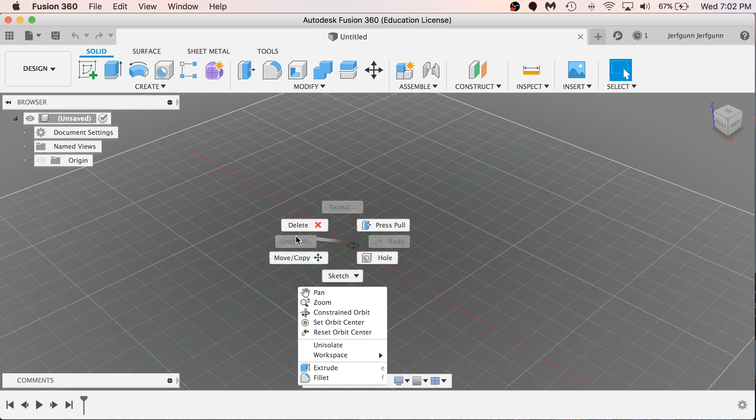There's a couple ways we can do it, depending on what you want to kick off. If you don't mind kicking off at the end of the class, we can prepare the quick job on Monday. You'll need the software. We can also do it in a break, but then you'd need to download and install the software.

That's gonna require some... by the way, he didn't model that, did he? I did not model that. You just ripped the file. I did. We're working up to that, working to not ripping the file. Yeah, ripping the files is the best strategy, except if there isn't one file. Then no.

So we're gonna go into a couple of new things this week. But by the end of this class, you guys are gonna be halfway through this intro class, halfway to being fully fledged crazy modeling experts, if I have my way. That's pretty cool. I was really happy with how things went last week, hopefully you guys got a little bit out of it. Okay.

We're gonna shift things up a little bit starting, well, it depends how far we get tonight, but definitely next class. I might have mentioned this last week, I don't normally like to stand up here and lecture and tell you guys what to do. That's not generally what I consider a fun way to convey knowledge, but to get you guys over the initial hump of learning this program, that's necessary to an extent. But starting next week, you guys are gonna start working a little bit more independently on a couple of things.

Where I would like to get to, in some measure or another, by the time we're done with the fourth class, is have you guys either well on your way or have completed a design of your own. And we'll talk, if we have enough time, for a few minutes at the end of class, so you guys can start thinking about what that would be. Basically just taking the things you learned last class and this class and putting it together in a way that allows you to be creative and come up with your own thing.

And I can help you guys get them printed out or whatever, if you want to take a video or what have you. Just something tangible that you guys are creating. So that's kind of what I'm hoping for by the end of the class.

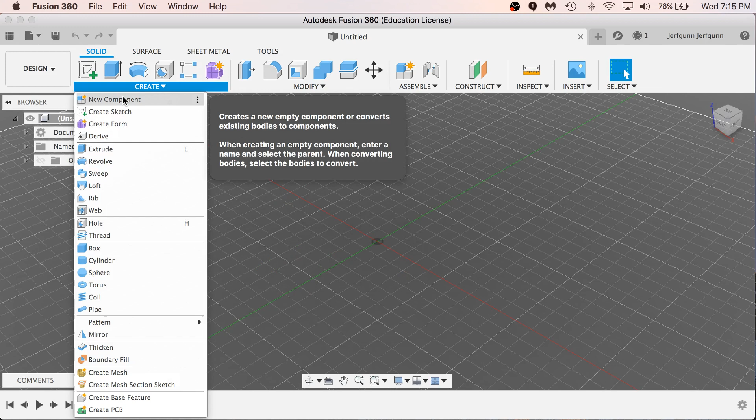So can you go through the create menu? See the option to create a new component? Okay, click on that. Now you can name it if you want to, or just leave it as component one, doesn't really matter. But hit OK so that we get a new component that shows up in our tree over there. Now when we create any sketches and take operations on those sketches, they're all going to be part of that component. We'll probably get to an example next week where that becomes really important, but for now just note it.

Okay, so for our first example of designing a part that actually has precise dimensions, we're going to make a mount. Have people seen these before? Have you seen one of these before? This is called a servo, it's like a little motor. You might control it with an Arduino, or it might be part of an RC car or RC plane.

And these motors, instead of just spinning like when you're driving a car, they go to set positions. So you use it to move the flaps in an airplane, or open and close the hand in a robot, something like that. So if we're going to design something that will allow you to mount this to a frame, we have to design a part that will fit this fairly snugly. It's also going to have the provision to put a couple of screws in to hold it in place. So we get a couple of things there that we need to locate in just the right places, okay?

Let's see. Here, yeah, I have a thing. I want that. You can give it to him. You guys can share. Give me the thing. Give it to him.

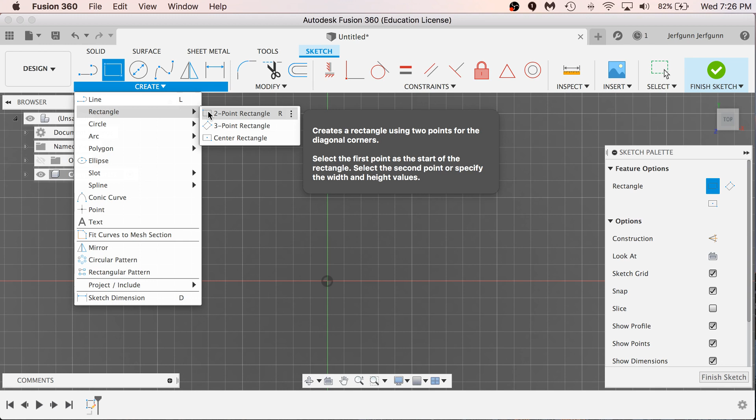Okay, what was his question? I'm sorry, are we going to build a model of the servo in the program and then use that to build the mount? Gotcha. Yeah, which I definitely do sometimes.

Okay, so let's make a rectangle, and the rectangle is going to represent this pocket in here in the part. So that's going to be 12.5 millimeters tall and 23 millimeters wide. So can you do a rectangle that's 23 millimeters by 12.5 millimeters?

The center rectangle, or does it matter? You know, whatever makes you feel good. 23 that way. 23 by what? 23 the other way, do 12 and a half that way, just so it tracks with what we sketched on the board. So do 12 and a half that way, and 23 that way. And if at any point you need a hint or a mark.

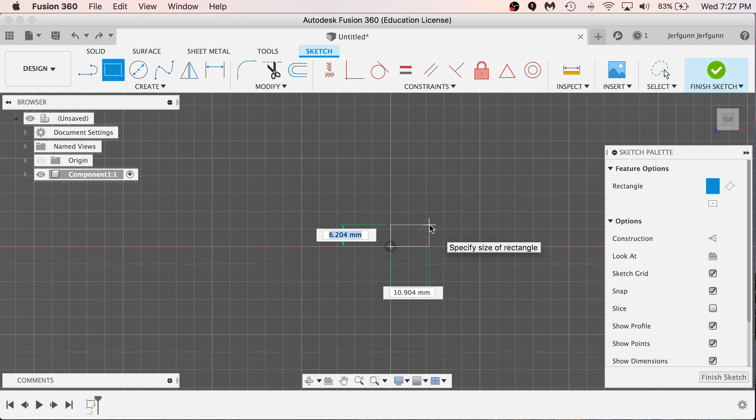How do you... what? You're not allowed to make it.

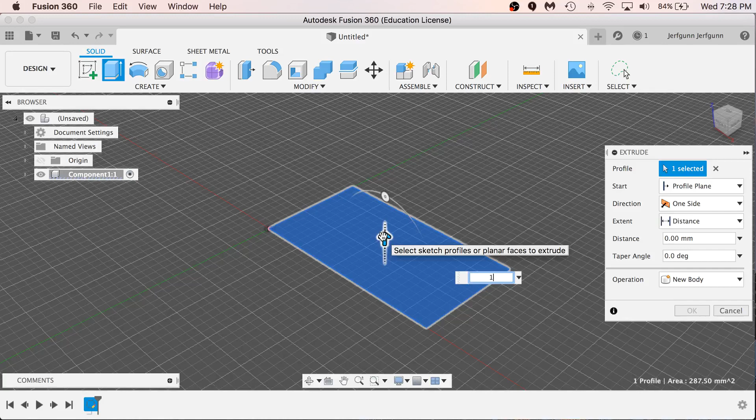So we're gonna extrude this. Set the dimensions, you actually set it on it. I'm gonna press R, it gives you the dimension, and then I'm gonna go up. So if you want 12 and a half this way, you can just type 12 and a half while it's highlighted here. You do 12 and a half, and then you can just hit tab to go over to the other one, and make that one 23. And then hit enter.

All right, so you've got your 12 and a half by 23 rectangle here. Why are you a little tilted? I accidentally grabbed the orbit tool. Okay, that's fine. I just wanted to make sure it actually was a rectangle, because if it wasn't rectangular, we'd have trouble later.

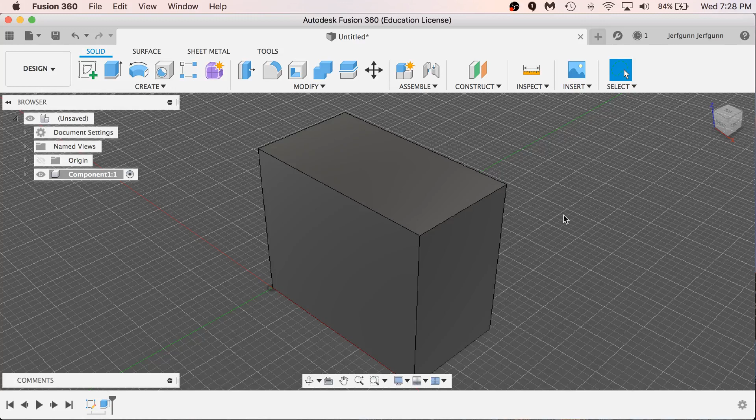Okay, so the next thing we want to do is draw this shape right here. This is the outside of the mount, okay? I'm going to arbitrarily decide that the width of the mount is going to be 5 millimeters. Do you mind if I guide you a little bit here? Yeah, I'm sorry, that's okay. So hit escape to get rid of the rectangle tool.

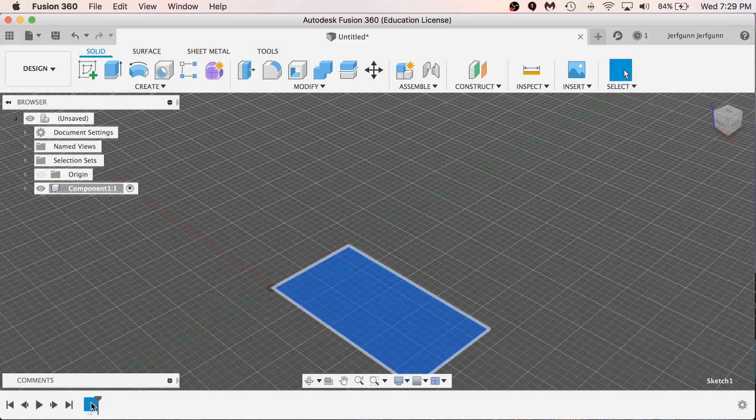And use the line tool, so go to the create menu and choose line. Now this is not the only way to do this, this is just how I'm going to illustrate it this time. Okay, start there. Click there to start the line, and then go off to the left by 5 millimeters.

Jeff, where's the line tool? Create, line - L is the shortcut for it. Okay, so you get 5 millimeters, click to end that line.

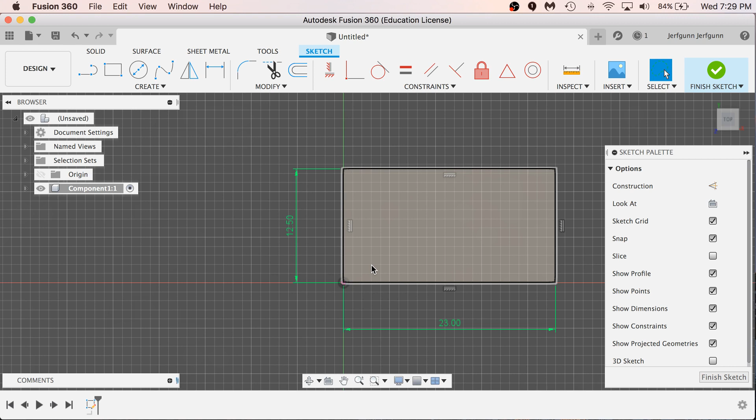Okay, now go straight up, keep it 90 degrees. Did you find it? Oh, you need to be in sketch mode first, so go to create. Oh yep, and then the line will be on. Okay, gotcha, thank you.

You betcha. Okay, so straight up, now if you want to go 5 millimeters past this top line, right? So if you were 12 and a half here, you want to go what, 17 and a half? Yep, good job. So click to end that line.

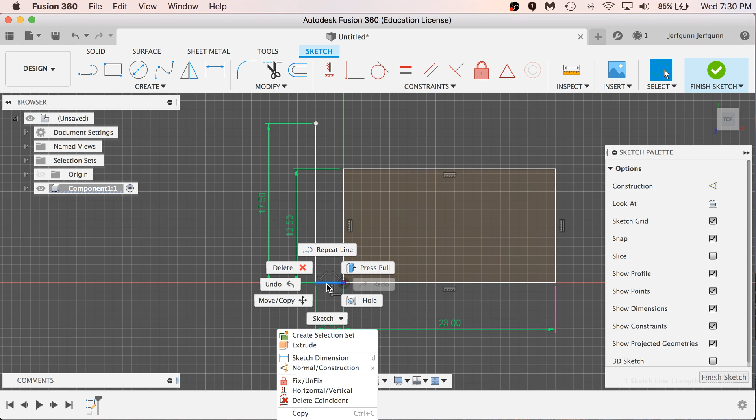Yep, then keep going across. So how far is that one going to be? Well, it's gonna be 23 plus 5, so 28. It would be 28 if you wanted to stop here, because you're already 5 out over here. Oh, so 30? No. 33. 33, so we're using...

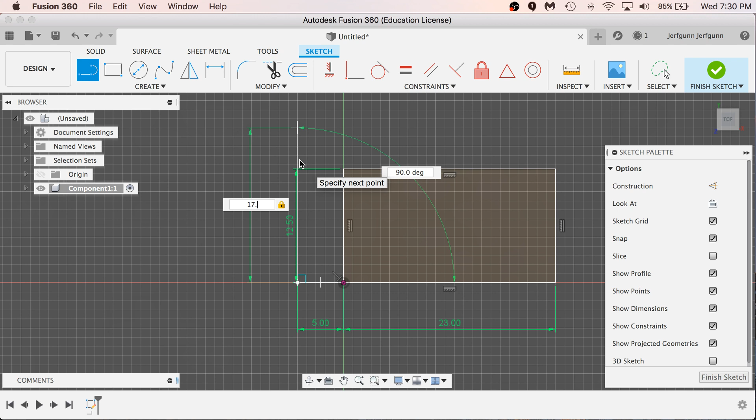I bet quick math. So you can actually, if you double click down in here, you'll go back into that. You do all the work, right? Line, go back - I was just drawing, trying to do the line. How far is this long one?

Yeah, technically, so if you go up to create menu - I'm just starting, alright. It goes 7.5 down, sorry, right? It's on the bottom left hand corner of the page, so we started here. Oh, that's where we started.

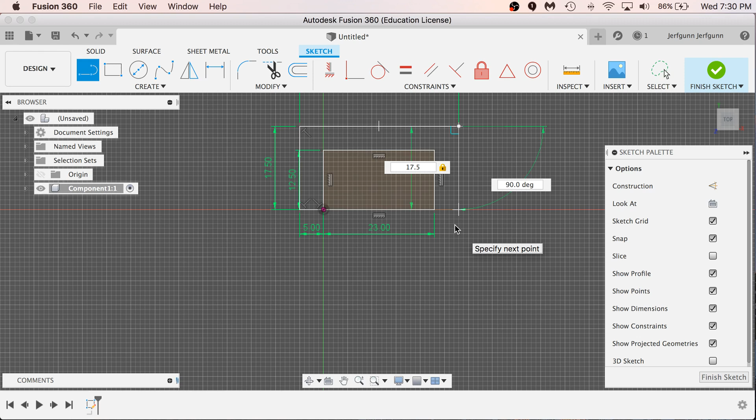Oh yes, let me get it. Bro, it's gonna only be like... mine just auto-filled it. Okay, is everybody sort of in a vague place near what we got up on the screen?

So here we're over 5 millimeters from the bottom left hand corner. I didn't do anything, we're just up - did it. 33, yep. Oh, no, not up 33 - 17 and a half. 17 and a half, and then reconnect down to the outer bottom. That's just the lines we made. Alright, everything's the line tool, all 90 degrees to each other.

Well, I didn't do that. If you're stuck, don't be shy, come over and look over your shoulder. I'm up on the right over there. Oh, there you are, oh cool. Okay, so it looks like you somehow got... click the top.

On the little square - oh, you're still in sketch mode. Yeah, click on the top of the cube there, the little orbiting area. It'll come up as a little box that says... see where it says top, on top of the cube? Got it, thank you. Click on it? Yep, there you go. You can rotate it if you want.

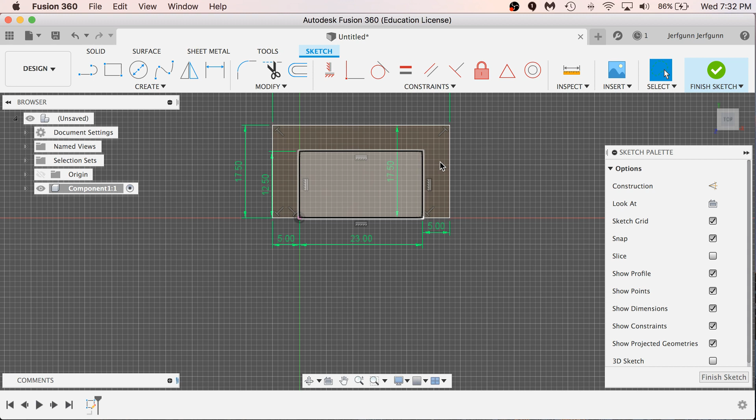I just wanted to zoom out a little bit, right, 'cause I need to see. Yep, that's totally fine. 0.05, right? And then go back into the line tool. That was crazy. Over, got it. Yep, so I went over 5, correct?

Yeah, same though, I don't need a sim. And then go down, it's gonna be 23 plus actually 5 more, plus 5, so 33.

Everything closes and then here, back across... 17.5, it's 17.5, the zero button. Then go back up to reconnect with your rectangle, the zero button. Alright, you guys are doing great. So once you get that sketched out, go ahead and click finish sketch and you go back into 3D land.

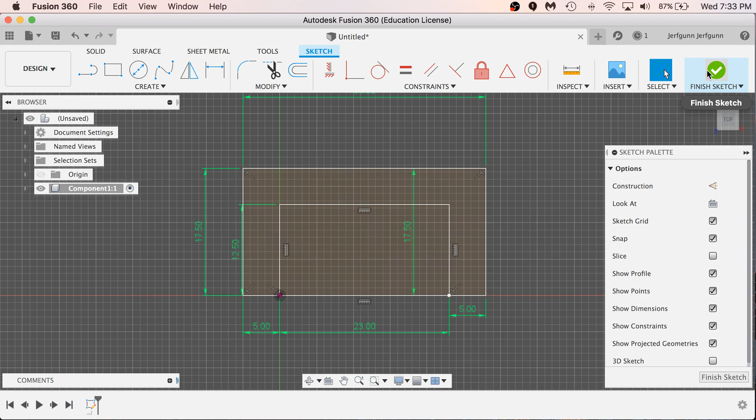And now let's extrude - you can leave the interior box alone, but extrude the outside C shape up the height of the lower part of the circle, which is 19 millimeters.

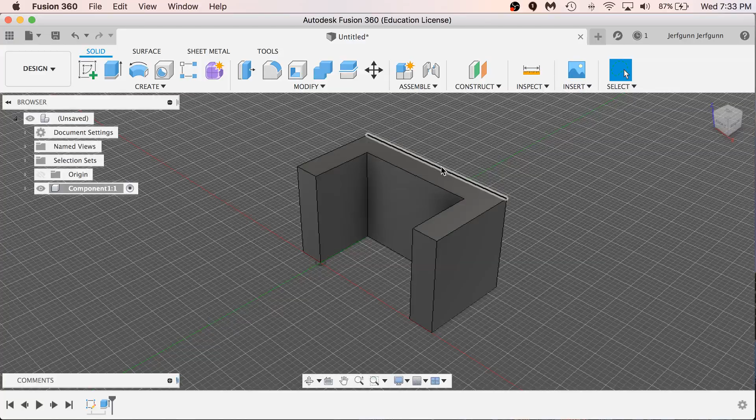So what we've done then, if we look back to our drawing over here, we've created this section here. Yep, that looks great, that's looking good. And how high do you want to go?

So you don't want to select the interior part, you want to select the outside part, so you can click it again to deselect it - the blue one - and then click the outside part.

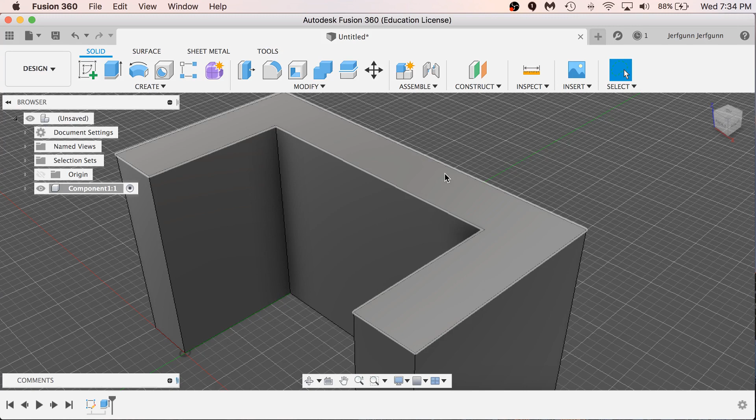Oh, that's weird. Do you not have a closed shape for some reason? Okay, so hey everybody, see up here on Marcus's screen, the line is blue, the inside is kind of shaded orange and the outside is not. When you draw a 2D shape like this and it's closed, all the lines interconnect and it's an enclosed shape, it shades it in orange to let you know that.

For some reason Marcus is not. What am I missing? Well, let's find out. So if you double click to open up that sketch again, the last side right there, I think - the last one right here?

Yeah, I think you need to create a new line. Can you double click on this sketch down here to edit it again? So it's the last one in the timeline. Hit it again, double click.

I am double clicking, it's not doing it now. That's kind of weird, left click it, and then edit, I think also works. You mean right clicking at it? Yes, or left. How do I get back to the flat? Yeah, right click wasn't doing it either. Let's get back here, back to it.

I enjoy this a lot. Yeah, you know, that's right. Yeah, above - how did your cube do?

On these two corners, like where the lines would normally reconnect - because I think one of them is maybe not totally connected. Yeah, that one's not quite connected. Oh, look at that, yep. So can I just drag it over? Yeah, do that.

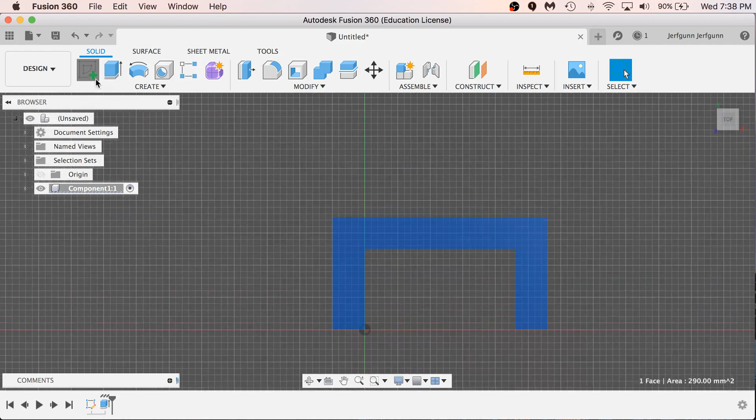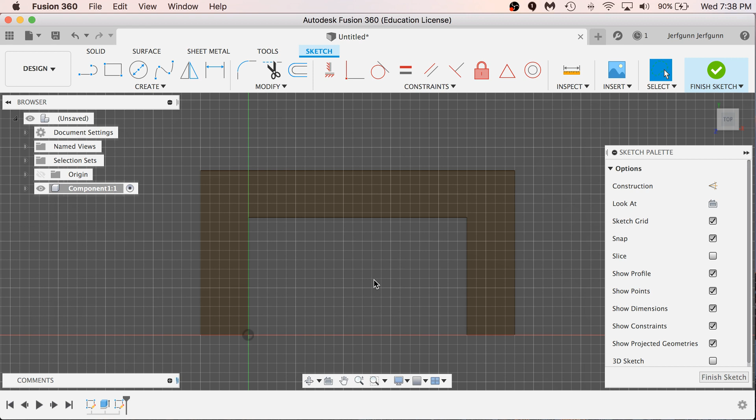And we're going to do something a little bit differently now. Before, we've created features that just sort of snap to something already in the drawing. But we got to create these holes in the middle of this space. There's a couple of different ways to do it, but we're getting into more advanced drawing operations now, and I want to show you a really precise way to do it.

So let's draw the first circle.

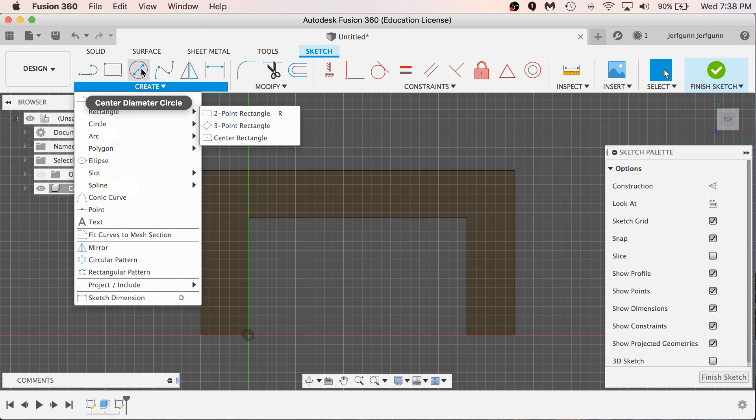Can I ask, we need to know where along the side it goes, not just this way, but when the thing fits in, how? Yes, that's a good question. So Gordon's asking, how do we know where the holes are going to be located on this axis as well as this axis? I guess it's sort of cheating for me to say that I know that they're symmetrical, that these holes are in the middle of the flange, and so they're going to be in the middle of this space. But we're going to locate those in a minute.

You could measure them though. Yeah, right. Okay, okay, hey, do you have a revised version of this?

Jack? Sorry, didn't mean to interrupt you. No, go ahead, you wanna draw a circle?

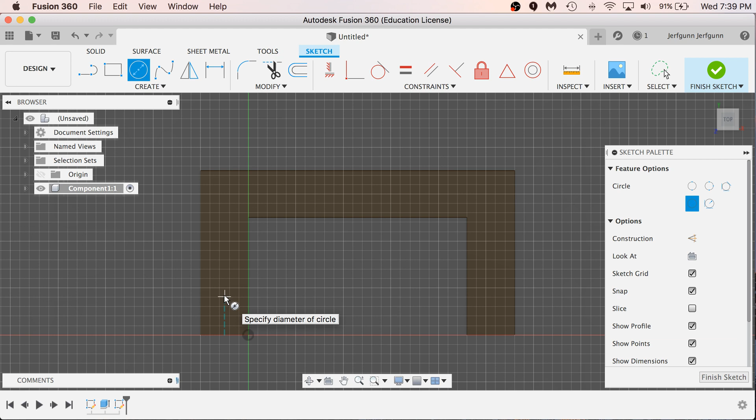Don't worry about where it is though, okay? Draw a circle, make it 2 millimeters in diameter. Do you want a center diameter circle? Yeah, do a center diameter circle. Don't worry too much about placement, just make it 2 millimeters in diameter.

And then do another one over on this side as well, okay? So you're gonna have 2 circles, they're gonna be roughly in the right place on the model, but not precisely located yet, okay? Great. Now, we know that those 2 holes are supposed to be 27 millimeters apart, because we wrote it down before, okay?

So we're gonna use the dimension tool. Go up to the create menu up here, and go down to the option that says sketch dimension, the last one. The hotkey is D.

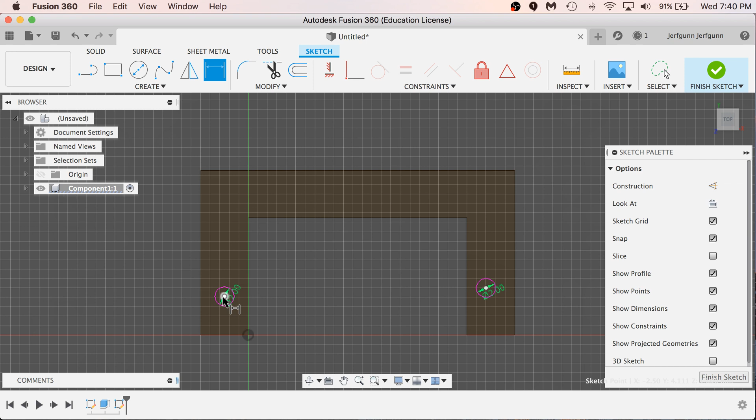Okay, now click on the center of the circle, and then click on the center of the other circle, and then drag the mouse down southward, and now click again.

Okay, it gives you the option to set a dimension, type in what we're looking for, which is 27 millimeters. So go ahead and draw a circle.

Don't worry about exactly where it is, but make it 2 millimeters. Yep, we'll do another one over here.

And then we're gonna set the distance between them using this dimension, the D key. Click the center of both circles, then click to drop that dimension. Now go down and type in the distance, which is 27 millimeters.

So did everybody follow that? 2 circles, then you set the dimension to 27 millimeters. Did everybody get that? Yes. So now these are the same distance apart, right?

But Jack, if you click on one of those circles, actually hit escape first to get rid of the dimension tool. If you click on one of those circles and kind of wiggle it around, you can move them, right?

So they're moving together, they're fixed relative to each other horizontally, but there's nothing holding them in place. There's nothing saying where they're located in the model, right? Oh god, so we gotta take care of that. I know, what are we gonna do?

No, I just don't like how it moves in such a bizarre way. Like it moves at an angle. It feels like the worst control.

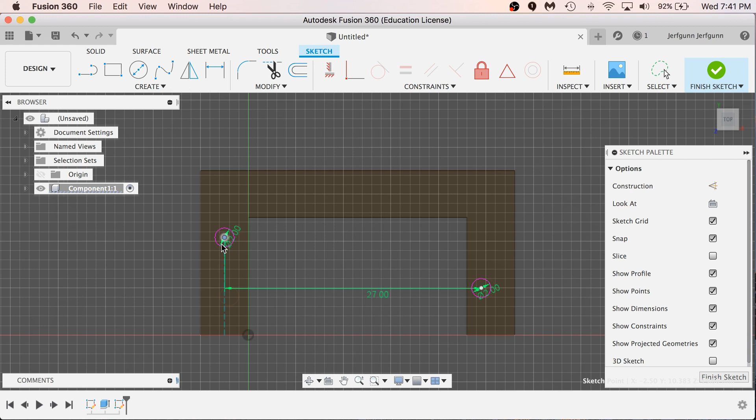Center point. Ah, okay. Alright, so now. Okay, wow, how did you even do that? Wait, why is yours grabbing one of the circles, it goes up and down. Oh wait, no, that's both. Oh yeah, two sketches. Wait, look at mine. Okay, look at mine. Undo what you did. Yeah, I'm good now. Jack, just don't mind that. Look at this, excellent.

Got it. So draw 2 circles, one over that arm and one over that arm. Make them 2 millimeters in diameter.

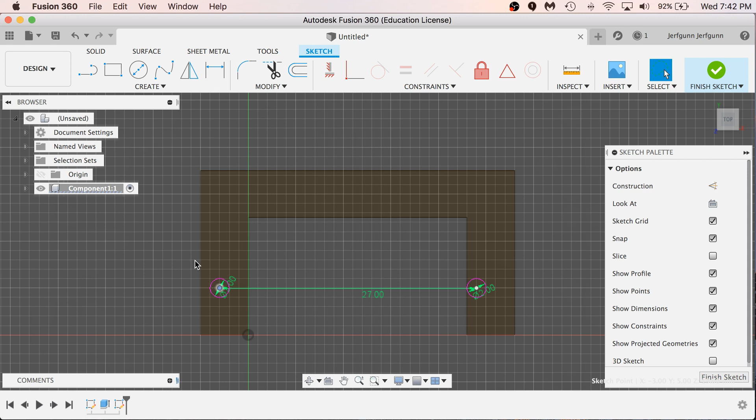Okay, so let's do something else to locate these in space. First thing I want you to do, Jack, is set another dimension. So go back to the dimension tool.

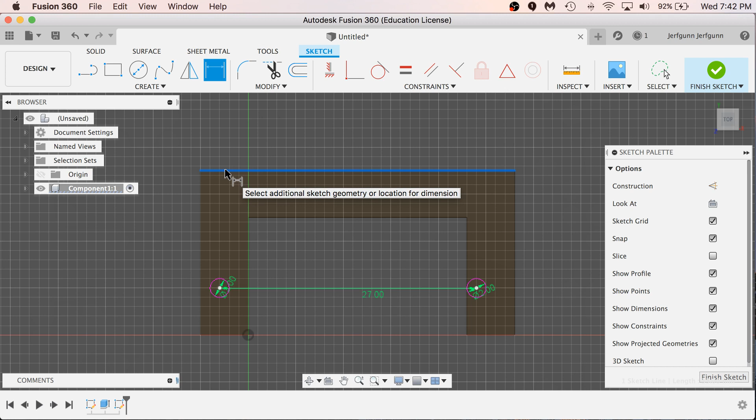Click on the center of that circle, and then click on the back line here, this line here. The one that I'm pointing at, yeah, there you go. So click on that, and then drag over this way. Alright, we're gonna set another dimension.

So the mounting holes are halfway back on this arm, okay? So I've got my 2 circles. We made this arm 12.5 millimeters thick, so what's half of that? What's half of 12.5? 6.25. Yep, so Jack, can you set that dimension to 6.25?

So I've got my 2 circles, Jeff. Set a dimension between the center of this one to the center of this one. Okay, so do I go to create? Yep, create, at the bottom is sketch dimension. Do I need to be in sketch dimension? Yep, you're good. Click on the center of one and then the center of the other.

And then drag down and click again. Doesn't matter how far, and wherever you want to put the label, it's just a decorative thing. Okay, and set that dimension to 27.

Do you have to do this for both holes? Oh, great question. So Gordon just asked if you need to set a dimension for both circles, and the answer is no. Because if we set a dimension between these 2 circles, and then locate this circle relative to this line, and then do one more dimension that locates it this way, they're all gonna be locked together. You're gonna see that in a second.

So Jack, if you hit escape again to get rid of the dimension tool, and you click and drag that circle again, does it still move? Yes, which way? Only on one. Yeah, mine too. So that means we're unconstrained on one dimension. Okay, so we're gonna fix that.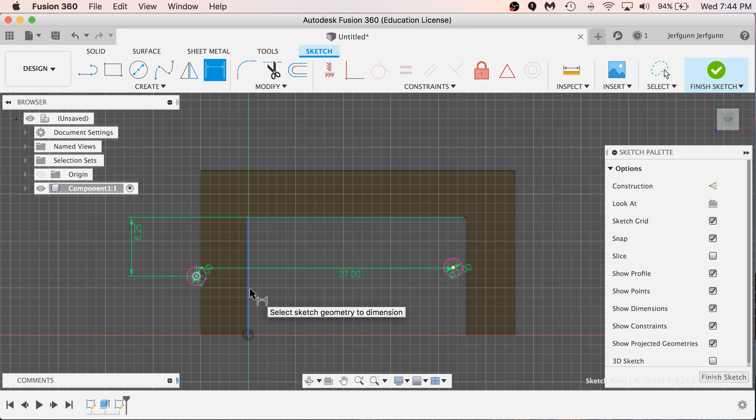Okay, so let's locate that circle halfway across this arm here. So set another dimension. Click on the center of the circle. Now you could set the dimension between this side of the arm or this side of the arm. My personal preference is to set it to the right side of the arm.

Any idea why? This might be kind of more deep, precise to the part, perhaps? Yes, exactly. So imagine for a minute that you draw this part, right.

If you set the dimension from this circle to this edge 2.5 millimeters, or from the center of this circle to this edge 2.5 millimeters, both are correct for this part. But if you go back later and decide this part is too wimpy and you need to make it 7 millimeters wide, that hole is going to be in the wrong location, because it's going to be relative to that edge, which may change when you expand the part outward. We're going to see a better example of that later.

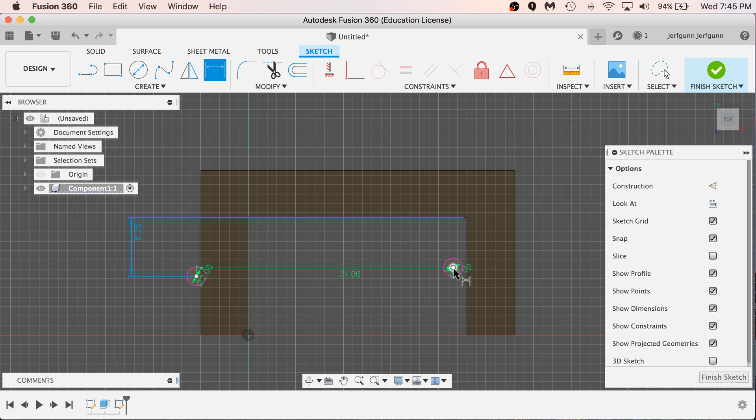But for now, set that dimension to the inside edge and make it 2.5 millimeters. You okay? Yeah, doing great. So I'm gonna go create, set dimension. You're good right now, you have everything.

We might have to click, 27 or 28? You goofed something way back. What's this dimension, 27? So I click on the center of that circle. Maybe it's 20. And what? That's right, that right edge.

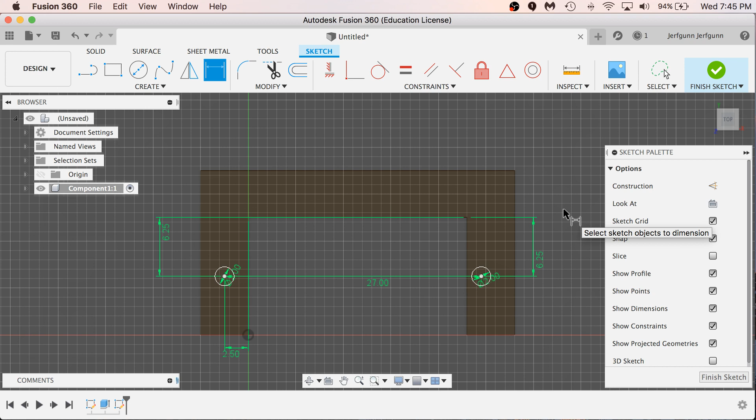Okay, it looks like there's some dimension there at the top somewhere. I'm going to back up a little. I can't get mine to move. What's the size? 2.5 millimeters? Okay, Jack, I bet you can't move those circles in.

Oh wait, this one can't. Closer to the edge than this one. It's 28, wait no, the bottom. One is 28. Hey Jack, yes, once you hit the middle of that first circle, what are you talking about?

Do you then hit the right edge? Yeah, that freaking monitor. So you hit the middle of the circle, then the right edge. Yeah, or it could be the left edge. One of mine is closer, spaced off the sides. Mine are perfectly balanced.

I just set mine to 28. How do I change it? Just click on it, double click. But mine's perfectly... double click. 27. Okay. I need my dad's PC. This dimension, which is 23, is that not right? No, you don't, that's the least I want.

It's supposed to be 27, but 28 works for me for some reason. Mine's a really weird dimension - if I do 27, they aren't centered. Well, I was using 27 and it was looking weird too. Mine looks fine with 27. These are 28. Not horizontally - 28, 28 is good.

I think Drew is wrong, something because mine are still moving. Drew is objectively wrong, yeah, we'll fix that. Hey, so you can set distance, yeah? What's that, like 2.5? It's funny, I knew... yeah, I didn't, when I was drawing this, I didn't come up with that.

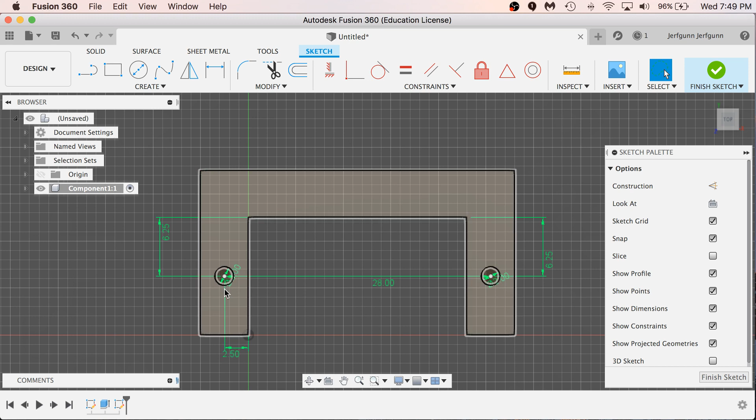It didn't seem to do anything. Yeah, that's what I felt too. Oh, there we go. The first click must not have been in. Sure, wait, so that only works.

Okay, let's just talk for a few seconds about dimensions and constraints. You look puzzled. We've been using dimensions to set the distance between two objects, like move this edge so far from this edge, or move this circle so far from that other feature of the drawing. So dimensions are fixed; they set distances between objects, okay?

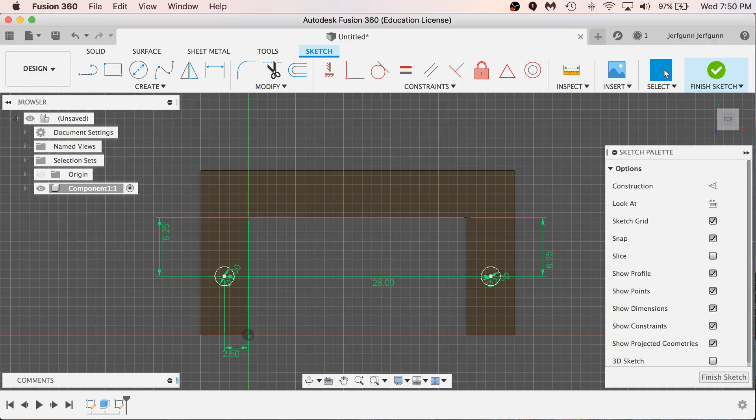Constraints set relationships between objects. We'll go through the constraints menu a little later, but basically you can set things to be horizontal or vertical with respect to each other. You can set a line tangent to a circle, set lines perpendicular to each other, or set one object at the midpoint of a line. All of these are relationships between parts of a sketch and other parts of a sketch.

These are super useful when setting things up, because a lot of times in a sketch, if you need a line to stay perpendicular to another line, and you go move that line, you don't want it to stay behind, right? You want to preserve that relationship and have the thing move together. So constraints are how you do that. We'll do more with that later, but that's a good example.

So are you able to fix that as well? In your case, go up to the constraints menu and choose horizontal.

Okay, so when you're at this point, go ahead and hit finish sketch.

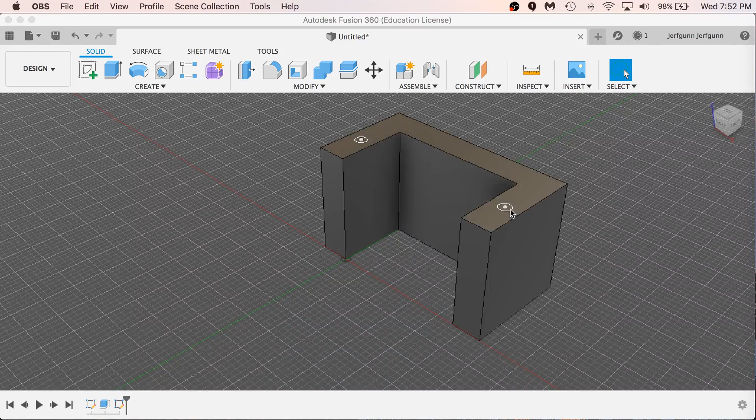And then you might want to go back to 3D mode just for the sake of clarity. You can click on that, yeah, there you go. My holes don't look right there.

So is Gordon on that one with the... Yeah, he's on the right. Yep, that's what's going on with mine.

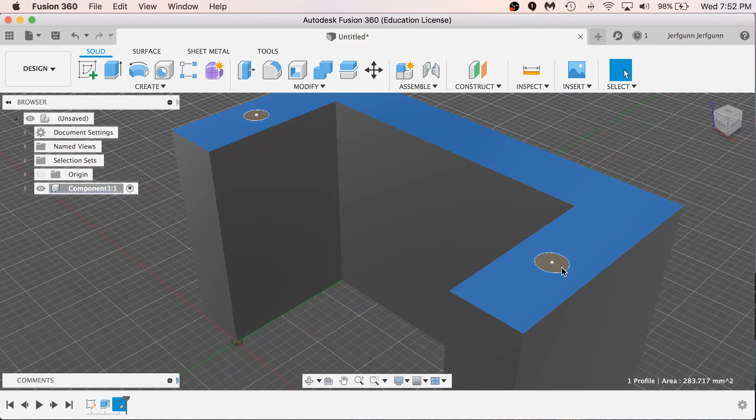I tried to put a dimension in, and it said I was over-constraining. It was like I was stretching. I think that means it's already locked. I've got 28 here, and it can't be more than 2.5 this way because it would go over 28. So it's like there's some friction there. I'm not sure what went wrong with my math.

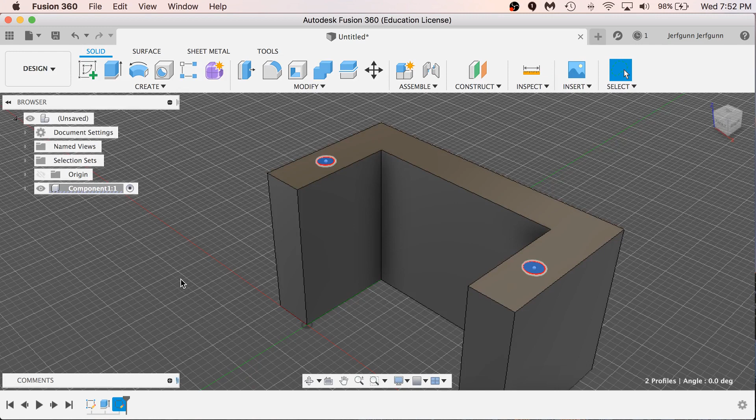Okay, at what point did it say you were over-constraining the sketch? A while ago, it's like the last thing I did. Mine looked like Gordon's, where it was a little too close to the center on one side, so I tried to measure it and put that 2.5 in because it should be halfway, and the 2.5 wouldn't fit.

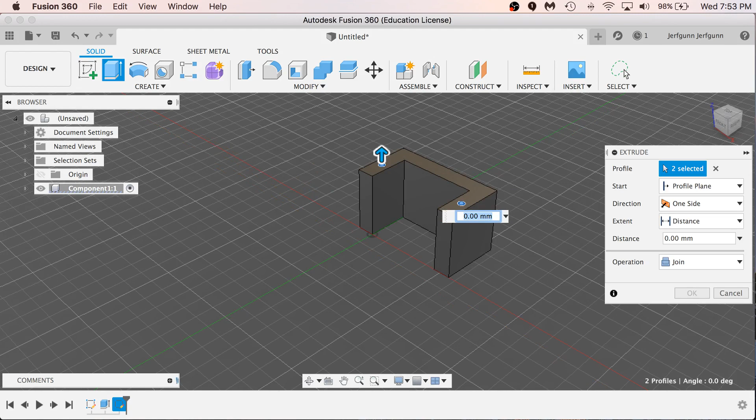Okay, so can you go back into the sketch there, Gordon? Down this one? Yep, the last one in the timeline. Double click that.

Oh, I just double-tapped on the 27, it comes back up with the distance between them. Drag that down and hit enter. Maybe I messed up my original dimensions. Let's see, did the entire table have 27?

I have one with 28. Did we do our math wrong somewhere? So yeah, we got 27s and 28s floating around. Is 28 correct here? You said 28. I'm quoting you as saying 28 between the two. 28 works, mine turned out that way too. I think that's what I did, was 28. We'll find out if it's right.

So let's see, there's a big difference. The width looks better on this pocket right here, so the space inside should be 23 across. The way you check that is make sure you don't have a tool selected, so hit escape, then click on this line right here. It'll give you a dimension. Oh right, that's here. That's what I did, that's 23, so that's correct.

That tracks with our diagram - where did you get that? Yep, this model does in fact say it's 27 in between the two. Okay, so something's screwy. I'm not changing my model, the distance between the holes should be 27 millimeters, right? 23 on the inside.

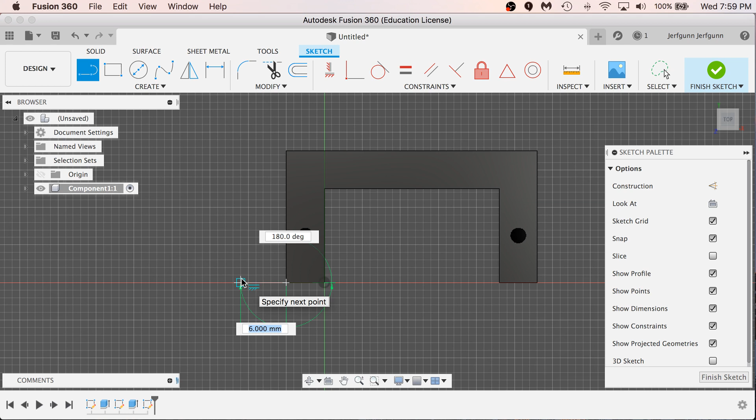It's about 10 millimeters. Okay, so how big do we want to make that flange? It's 7, so I drew it 7 out. When I made my model, I was sizing it for a 3mm bolt, so I made it 7 millimeters to give a little bit of room on either side. But again, when you're designing your own part, you can make it whatever size you want.

I just didn't want the area around the bolts to be really flimsy and break easily. Put it on the bottom. So go ahead and draw a rectangle around this edge. Make sure you snap on this top corner, you snap on this bottom corner, okay? Now you might be tempted to go draw the same flange on the other side, but I'm gonna show you something else to do for that.

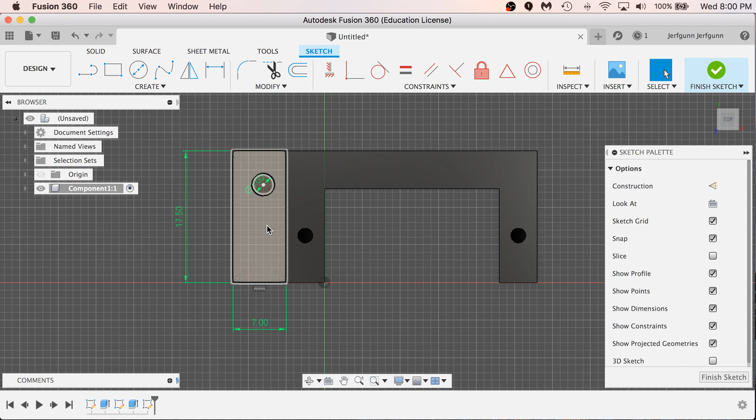Why don't you go ahead and add a couple of circles in here for the bolt holes? I'm supposed to hit create sketch, right? Yeah. How big are the circles? 3, right? Create sketch. That's 2 points. Yeah, go ahead and click on that, and then you'll be on that page.

What's up, you said what, 7? So we're gonna throw a couple of circles here. Try to double click. What's the distance between these two?

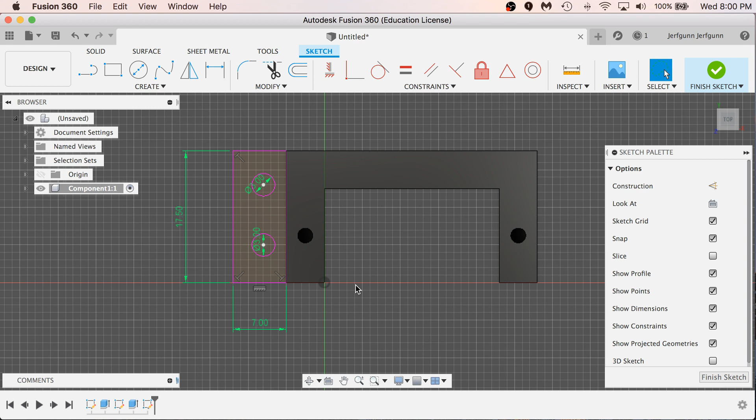Fail to solve, please delete. Well, what you can do is click on the 27 and hit delete instead. You don't want to click edit, just click on it to select it. In this case, click on the 27 one. Oh, you have two 27s, that's right. Happens every time.

Is that close? How big are you making your circles? I'm making a rectangle. Okay, so guys, how big are you making your circles here? We got 3mm holes.

How far apart are they? I do not know, would you like me to do that? I measured it, but I'm getting an inaccurate measurement because I'm bad at measuring. Well, you know how we get better? Practice. You use the text boxes and do it exact, or you ask your neighbor. Why is my rectangle not snapping? This is zeroed, this is not zeroed. Snap two corners, 3mm holes.

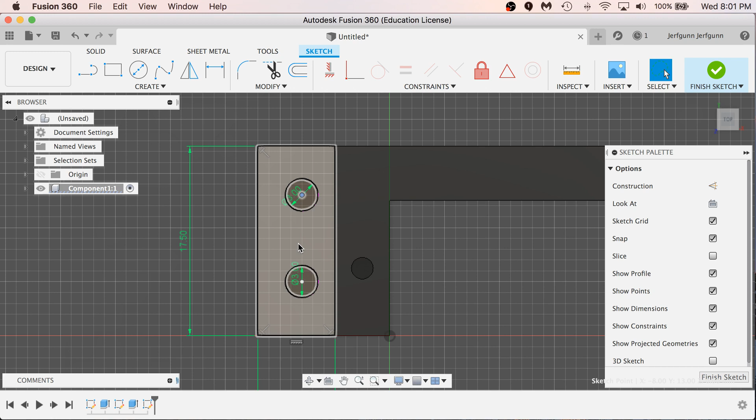They're about to go on the bottom. No, just run to the nearest point. That's where the millimeter things are apart. Okay, that works. I'm trying to make 7 millimeter rectangles. It's not snapping? Okay, let's undo. Or do you want a 2-point rectangle? Yeah, okay, undo, back out, and we'll start the sketch again.

Okay, the copies are small. Can you go back to your 3D view? Click on the little hole there. How far are we putting the holes apart? Now do create sketch.

Oh, you want me to go now? Yeah, the distance in the middle of the hole to the edge. I can't count. That's the easiest one, I can give you the edge of the hole.

So create a sketch. I can give you, they're probably centered. Yeah, but it seemed like it was behaving weird because you were sketching upside down. So you get down from the top, from the edge to the edge. Just how far, like spin it all the way down. That's the number.

Now do you create a new sketch? 2.5. 2.5 plus 1.5 is... there you go, 2.5 plus 1. So now when you draw a rectangle, it's gonna...

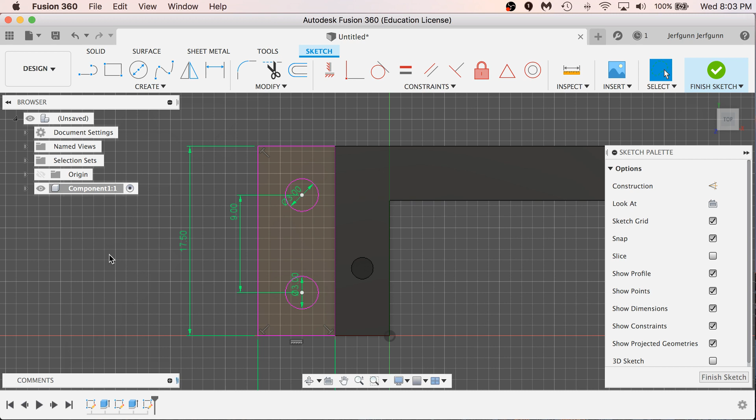I'm drawing it from the top, but it's drawn on the bottom because it's actually drawing on the base plane. I think it might already be considering that you're sketching inverted like that, so you're not really drawing on the surface that already exists. Please come up with a different number, so we really wanted to snap to those corners.

Yeah, alright, so how far apart are those circles? 9. Okay, so they're 9 millimeters apart and they're 3 millimeters in diameter, right? And then can you center them on that flange?

They are, nice job. So to make them 9 millimeters apart, we want to set a dimension. And they're 3 millimeters in diameter. Yeah, Jack's killing it here. We got two 3 millimeter circles, and he dimensioned them so that they are 9 millimeters apart.

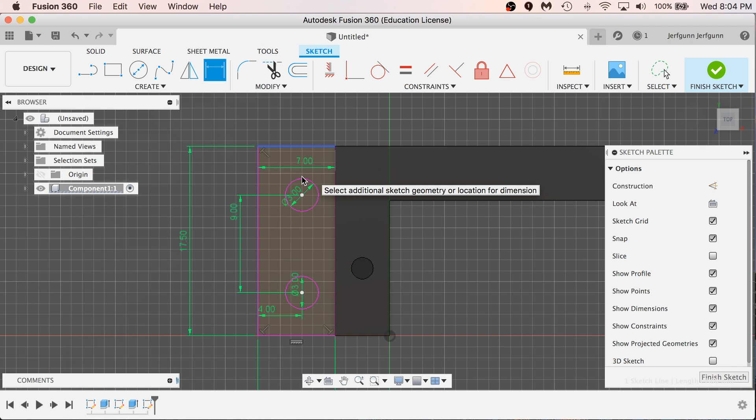Top and bottom, 2.5. How did you determine that? Because they're the same, if they're 9 millimeters apart and this whole thing is... how big? How did you center them this way? Well, we did 9, we figured out the little trick with the circles.

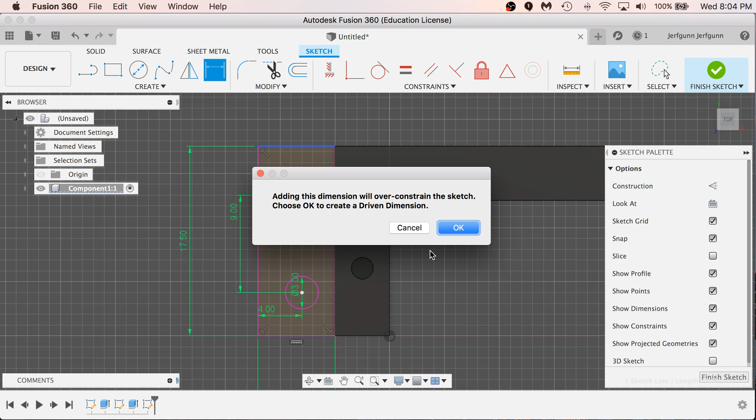And found that it was 9 in between. And then for the edge, we measured from the center since we're drawing point circles from the center. We did from the edge of the circle to the edge, from here to here, right there, 2.5. And then we added the amount that's from here to there, 1.5, plus 2.5 equals 4, and then just mapped it as 4.

Everybody follow that? So we're setting a dimension to what? 9 millimeters apart, 4 millimeters from the bottom edge. And then 3.5 this way, because that's half the width of the rectangle, so they're centered that way.

I used a different approach. That's totally fine, I copy what they have. Okay, that's... oh yeah, right, nice, that was my approach as well. Yeah, it worked, okay, you said so.

3.5 from the center diameter down to the center of the circle, down to the bottom? 3.5 from the center of the circle to the right. Oh, we're going 4 now, never mind, I can see it. Yeah, 3.5 this way, 4 that way. So there's that one, and then 3.5 from the center to this edge, 4 from the center to this edge.

It's a little hard to read the dimensions when they're all willy-nilly. If you do this a lot, you'll get in the habit of pulling the dimensions out so that they're organized and you can see them.

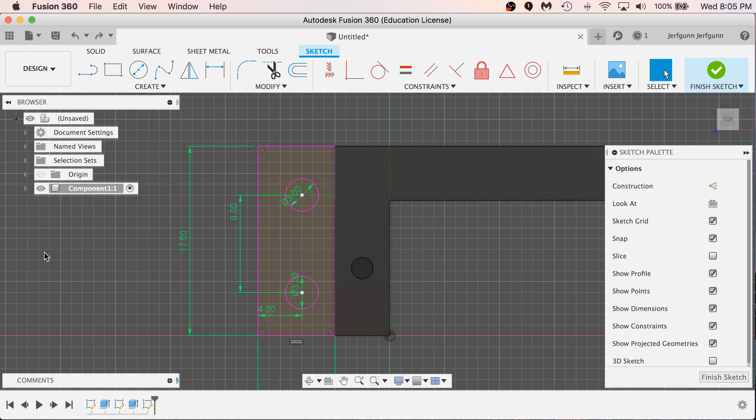What we're gonna do now, since you've created this flange on the left, is we could just redraw it over here, but we can also mirror it. Have we mirrored before? No, you mentioned it but we didn't. Okay, this isn't a big time saver since that was pretty easy to do, but we're gonna go through the experience of mirroring something.

So what I want you to do is go to the line tool and draw a line. Do you remember how to find the midpoint?

It's a little dot thingy on the edge. When you drag across, it should tell you where that midpoint is. Try down here. Look at the screen - sorry, where are you trying to?

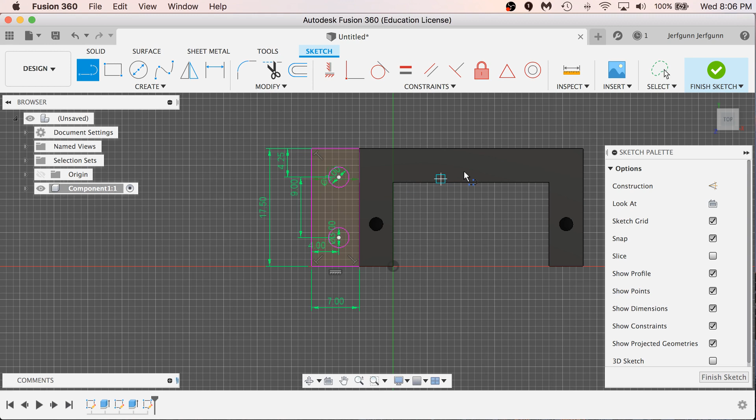That's okay, hit escape and select the line first. Go ahead and select that line. Now go to the line tool.

So Jack, draw a vertical line - don't worry about getting in the middle. Okay? Great.

Now hit escape. See this sketch palette over here? Can you expand that? Now click on that line you just drew. Well, I guess it's already selected. There you go - see this option here that says construction?

Click on that - an interesting topic. So go ahead and click on construction. See how that makes it the dotted line? That means you can use it to refer to things, but it won't get in the way of extruding and all that kind of stuff. And you can still move it around.

So click on that line to select it. Is anything on fire or are you okay? Just give me one more second. So click on the line to select it. Okay, now go up to constraints.

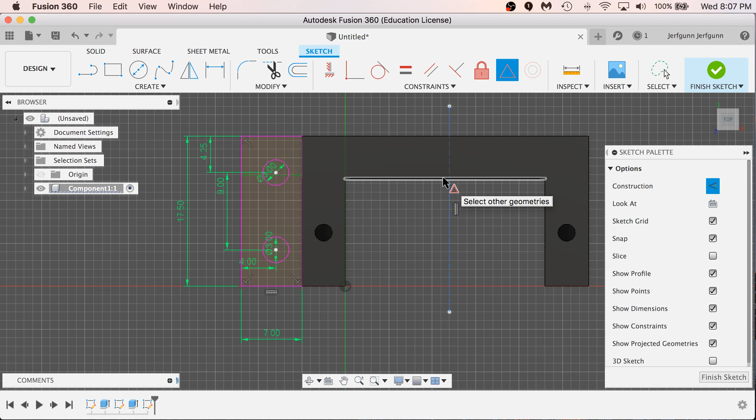There's a constraint option in the menu for midpoint. Now click on that right there. Ooh, so that snapped it to the midpoint of that line. That's a more flexible way to do it because if you ever resize this part, that line will stay in the midpoint.

Now Jack, try to figure this out on your own. Select the parts that you drew for the flange on the left, and then use the mirror tool to copy it to the other side. See if you can figure that out. Where's the mirror tool? No, the mirror tool is in the create menu.

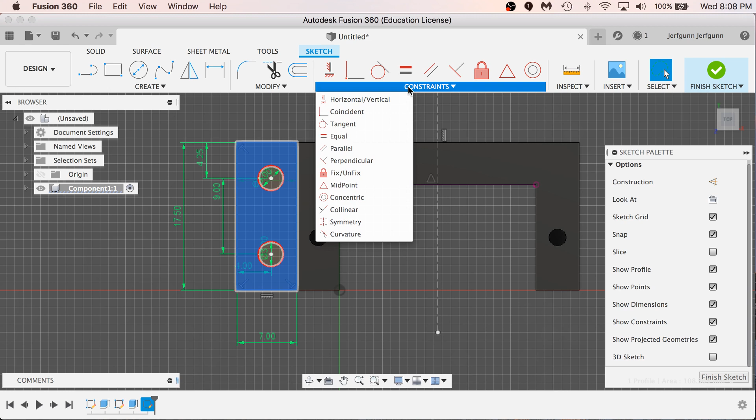What was the thing he just walked you through there for a second - the dimension? It probably means it didn't do anything - it's not attached to something important. So can we undo that? Now delete that dimension. Thank you guys. What was the thing he just showed, about constraints?

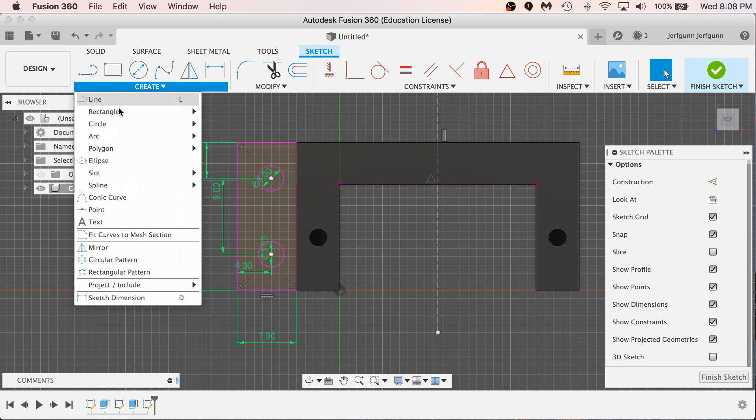So first you need to make this a construction line. Can you zoom in? There's a lot going on inside the drawing board. We selected this - we did the dotted line through construction. Now it's not going to interfere with the rectangle when you need to select all that's here.

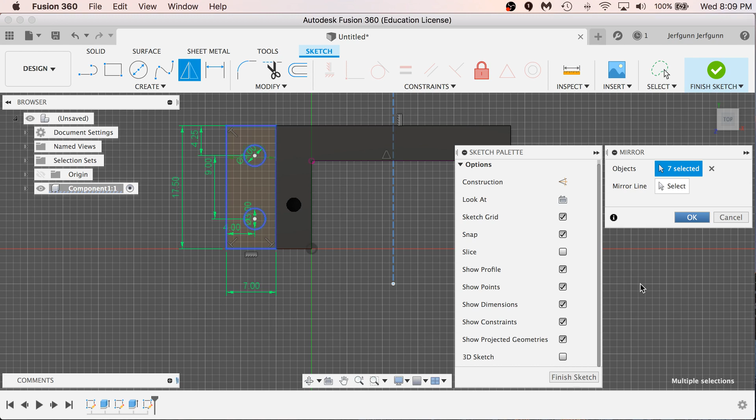So the sketch palette and the line tool - when you click on a line and go to the sketch palette, there's a little button. Can you click on the rectangle? What is the construction there? That did absolutely nothing for my sketch. Right, literally nothing changed when I hit mirror.

Now there probably needs to be the mirror tab on the right. Alright, so do you select the midpoint as the mirror thing? Yeah, I got all my stuff selected and then I hit mirror right here. No, here's your problem - alright, press cancel. So select that with the select tool, and select all that.

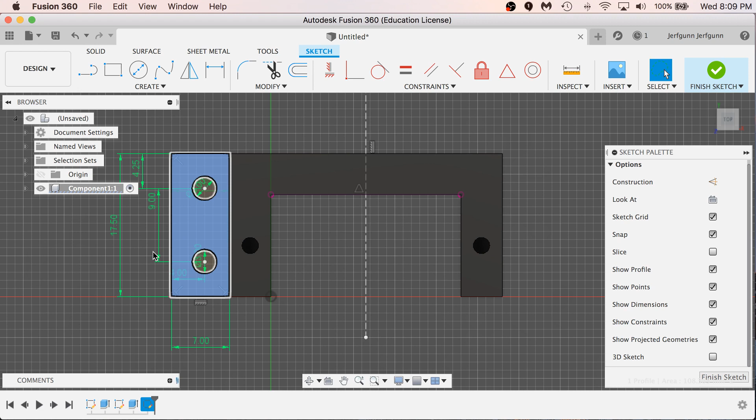I'm only mirroring this part. I know, but you're not selecting the lines, I think you're selecting the weird stuff. So just use the select tool, just select everything.

Oh hey Jack, yes, looks like you figured that out. Okay, did everybody see what Jack did there? Then go to mirror line. Tell me if I'm right, Jack - where, that one right there.

Did you just click select that, and then click circles, in the square, and then mirror across this line? Is that what happened? You're missing one line, I guess - the rectangle. And I think you might have missed a line - you're missing a line on the other side as well. Did you draw the rectangle using the rectangle tool, or did you draw both sides?

Okay, so you don't normally have to select all four sides, but if you ever get in a situation like that, you can double click on one of the sides of the rectangle and it selects all of them. So Jack, that looks great. Thank you. Was everybody able to mirror the features like that?

Anybody stuck? Yo, look at this. Okay, so you got your mirror line and you got your parts there. So you go to, here - select the circles first.

Click in the middle - rather than clicking and dragging like that, just click on them. Select mirror. Your midpoint is right there. Pause the mirror, you're still in the right tool. Right, hit mirror line.

Select the construction line, you got all these things selected. Go to mirror line. You didn't create a midpoint line, and then you click - I just started this dotted line, trying to fix the thing this whole time. That was great, the dotted line.

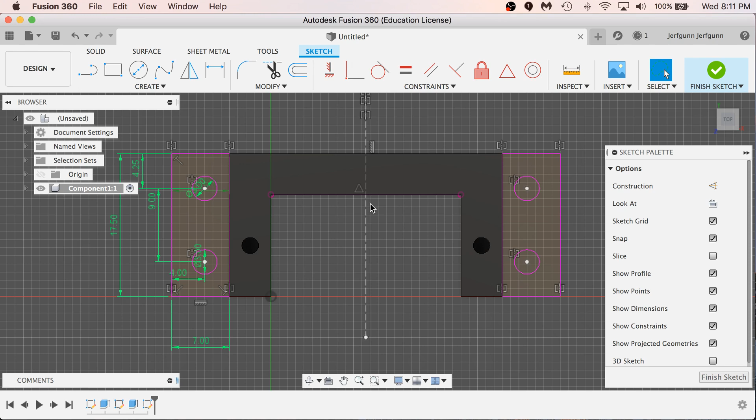What was that? So you create a line. Okay, so now using your midpoint is that mirror triangle tool. In this case it's probably not like it saved you hours of work, just create a line, but can you see how if you were doing a really complicated part that was symmetrical, that would be a big time saver?

So I sketched the line - this is a sketch, boom. Okay, and you are in the construction mode, so I make that the construction. How far are we then constructing? Are we bringing it 3? Yeah, 3.

I didn't select everything, because I've got 2 circles and so it's now on mine. Click on that. Okay, now look at the stuff, click on it. So could I bring up the sketch palette and do this? Okay, doesn't love it yet. And now click on constraints, select the midpoint option, now click on this line. That looks okay.

You guys, this is one of those deals where you can hold down tab to select all like, I wonder if it's just not rendering it properly. How big is this, Jordan? Oh, I know - okay, so no mirror at all. You're back in the sketch now.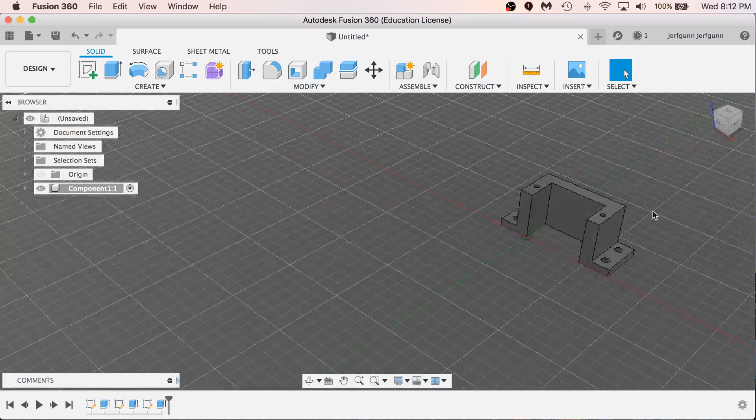This line - I bet you it didn't mirror the last line of the rectangle, and it didn't do it correctly, but you know the rest. Yeah, can you undo and we'll mirror it one more time - it didn't select the rest of the line. So choose mirror, now double click on one of the lines on the rectangle, yep, and now select the circle.

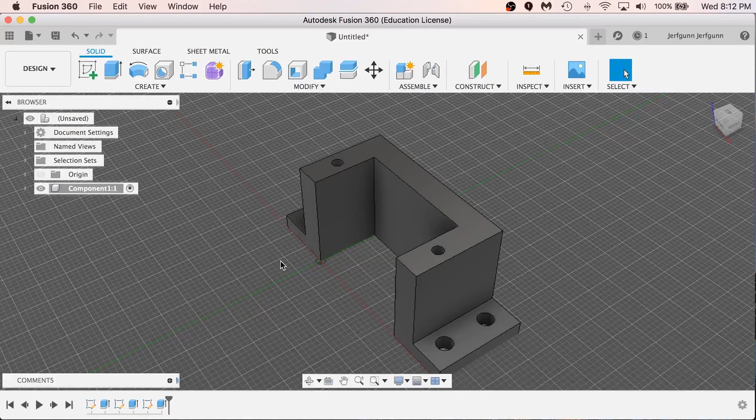Jack, how tall is this thing? There you go, this is 5. Okay, Jack, how tall did you make your flanges? Oh, I think 3 tall. Okay, so if you guys have your mirrored flanges, go ahead and extrude those up to 3 millimeters.

Does anybody want to start back for a sec? Yeah, I mirrored my 2 circles and my outside line, but not the rest of my rectangle. Do you want to put it up on the screen? What do you wanna do? Doesn't matter - I have my mirror line selected, but I can't select down. You can take my screen. I don't think I'm really - alright, screen it.

So then click on it, it'll join the shapes in the object line window, and select the other things. Double click on this line, don't include the circles, on the side of the rectangle, and select it - no, double click it. There you go, get the whole rectangle, and then select the two circles, close.

And then select the circles. So if I go back then, got it, then hit it. Got it, so I just got rid of what I did. So this is what I did, right? I had just those two circles. So if I undo that - undo until they disappear - there we go, so now do I just click?

So select the mirror tool first. I need this - now double click on one of those lines, and you'll select the whole rectangle. Okay, now select the circles. Double click again? Yeah, just single - double click is when you have something made up of multiple pieces, like a rectangle. I've got four rectangle sides, 2 circles, so 6 things, and then the mirror line.

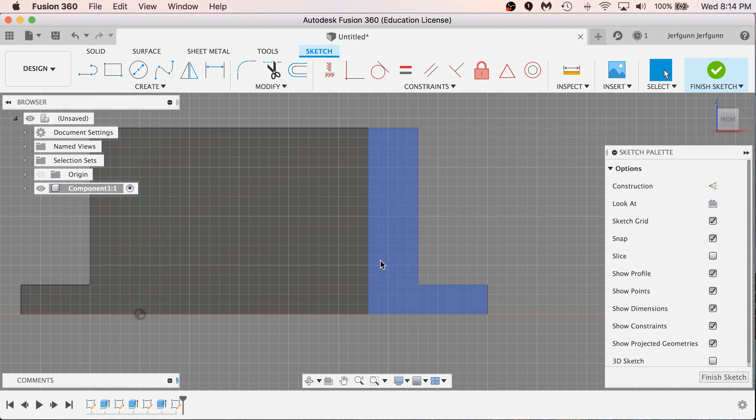Wow, when I drew my sketch, I hit the very top of the thing. Okay, so where the screw holes are, I'm opening up like the - now most, I hate that part.

So we're waiting on somebody to come up on the monitor here? They could put it on the bottom if they can mirror it on the y-axis, they can just mirror it down. You can - there's an easier way to do it.

So here's the thing about Fusion: if there's anything you could possibly screw up, they'd probably put a fix in for it, right? You can recover from almost anything that you do. Control Z, alright, is the best.

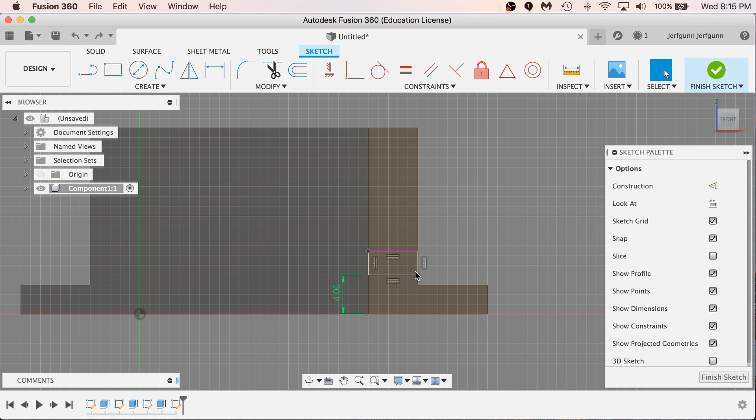Oh look, everyone's doing the browser thing again. So I go sources from the desktop? Yep, exactly, and then you probably want to select the desktop and share. Come on, I want the right thing. You guys can do this.

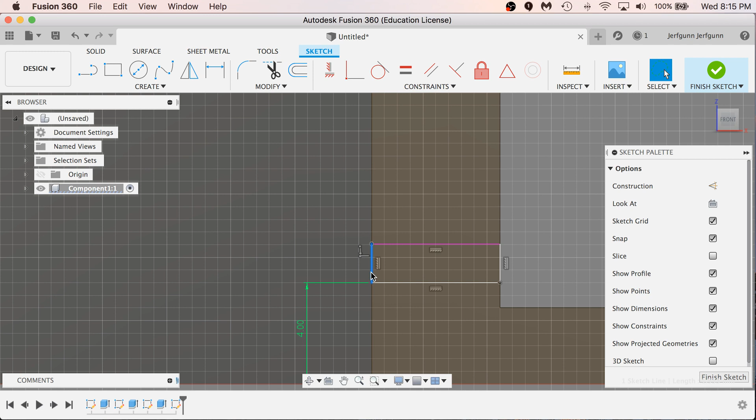I believe in you. So is this what it should look like? Is this you? That's me on the right. Wait, how - it looks like actually you guys did the same thing, which is you both ended up with the flange sketch on the top surface rather than the bottom surface.

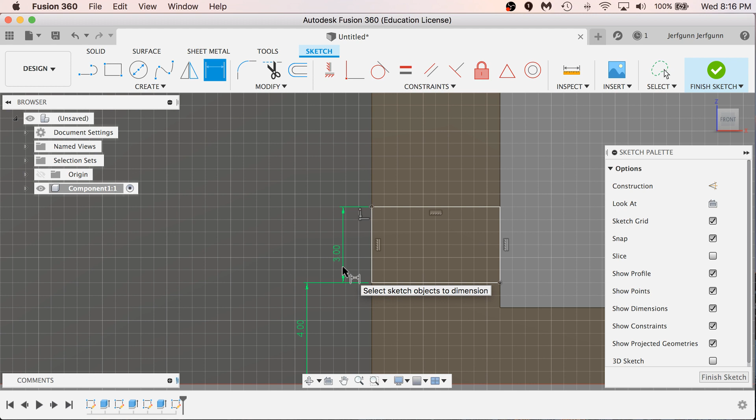Okay, well, aren't we at the cool table? Can I show you how to fix that? Yeah, so basically, we haven't really learned about construction planes yet, that's sort of next lesson, but your sketch is on the wrong plane. Okay, I did this last week too. This is how you fix that, okay?

First thing I want you to do is, see up here where it says origin? That's... how deep is it, Jack?

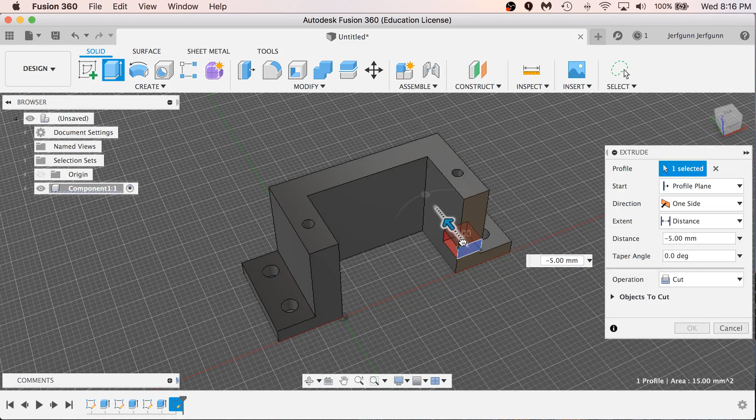It kicked me off. The left computer is really weird, it keeps breaking the screen. You took a really long stretch where you were trying to measure. The first round it took me like 4 times to connect. Just use one of them.

That's why. Who's over there? Okay, and then subtract this. What are you trying to measure? It's not taking my desktop. Check sources, go to desktop.

Well, we did the same thing opposite order, I did it like 4 from the bottom, can you pop up here? And it's 3 high. Jack said 2.5, I said 3.

Well, we almost got it there, 2.5, that's what I measured. It keeps me as soon as I hit two, 3, Jack. It doesn't matter, I like a little tolerance for my cables.

Alright, cast, yep, change the source. Sources, desktop, desktop. Where is it? Screen, you're right. It doesn't matter, you're gonna extrude it anyway. Hit your desktop there, and then hit share. Okay cool, we'll go ahead and put it. Looks like five over there, yeah.

No, it keeps dropping. Wow, I don't know what's going on there, it's kinda hard to share stuff. Wait, did somebody, who's that? Jack, I think, was that you? That was me, my computer just won't stop connecting to one of them.

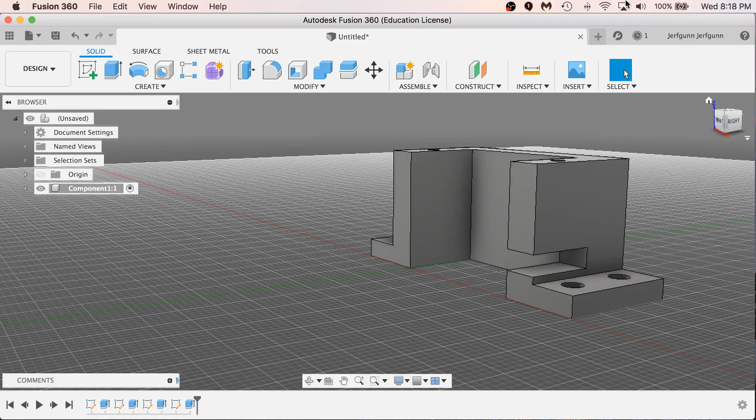I wonder if maybe the problem we're having is it's extruding. Yeah, I'll get ready for him too. Come on, let's start this out. You seem to extrude it the wrong way. If I extrude the other way, it looks like I'm gonna hit his face.

Even if I move my mouse a little bit, if I touch my mouse, check this out, if I extrude this way, this line disappears. That was weird, that line doesn't need to be there. It does if I wanna drag it down, I'll try and see if we can.

I think we made the same mistake, so what we're gonna do, I'll throw mine up there. This is where the screw is, it needs to be down here. Okay, right there, click on screen left one more time.

And then hit your desktop. Oh, you selected the top face. I know, when I made the sketch. Sketch, okay, well you just flip it upside down.

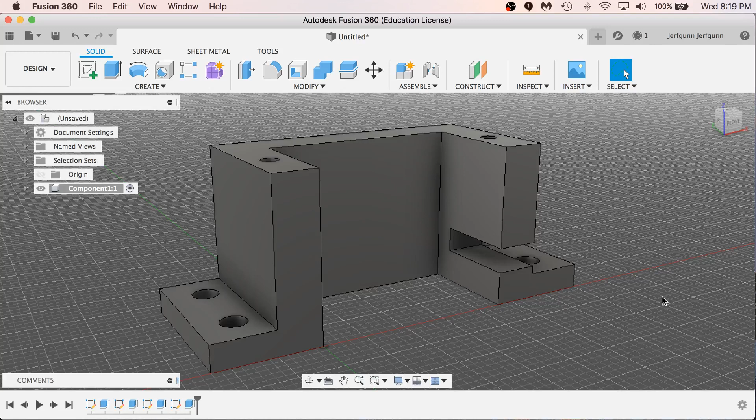So Marcus, you can extrude it twice. Is this what yours looks like, bro? No, go all the way down, you can go all the way down, and then extrude the top down a little bit. Oh yeah, that's like the most complicated way, but like...

Hop back on here? I will. Where is DK? Hey, I'm up. Great, okay, so your sketch is on the wrong plane, so let's fix that.

Can you expand right here where it says origin? Wait, where's DK, where's his origin? Yeah, I just found it. What we're gonna do is we're gonna move your sketch, which is up here, down to the insert plane that's down here, okay?

Click on this sketch, the sketch in your timeline, the last one you did. Right click on it, and there should be an option there for redefine sketch plane. So right click on it.

Right click. Offset plane's a little different. Do you know how to right click? Is that the other option? Hold on, stop. You're on the sketch, this one? Yeah. Do I have to have an extra sketch?

I like when my computer... who has internet? Don't bring your frying computer. I can feel the breeze off those fans. Yeah, there we go, okay.